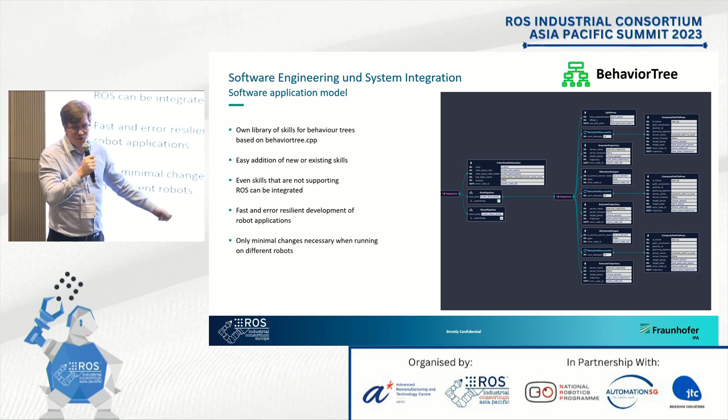Otherwise, we've also now integrated this with GitLab here. So in the end, the whole flow you can control from the cloud. And in the end... where's the play button? Somewhere's the play button, Ansible deploy.

You can then basically deploy it to your robot controller, and you're ready to go. So that's basically all built on open source software. I know there's a couple of different companies doing similar things, but we're trying to do it open source as much as possible. So you'll find the behavior tree CPP online. There's also our code that is called a ROS model, which you'll find on GitHub. The deployment is not yet released.

Okay, now we get to the next part. Here is basically a bit of the test fields that we use for developing this technology. The first one we finished in 2022, with basically 3 robots. You can see that down here below, with me running in the picture.

In the end, that was one of the first test lines we had to use that system and model everything. At that point, we weren't yet using behavior tree CPP, but had an implementation in ladder on the PLC. That was not the best idea.

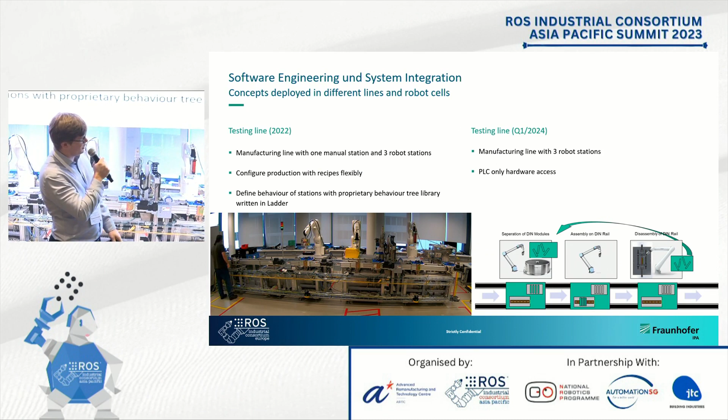That's what we hopefully will have done in Q1 2024. That's mainly a hardware availability issue. So there we're going to build a similar line, but with a different process than we have here. We're going to focus on DIN rail assembly because that uses a bit of force-controlled assembly.

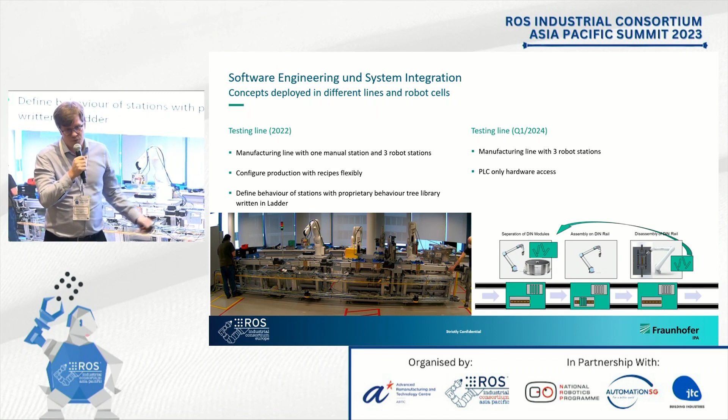There we're basically going to have the whole behavior specification done in behavior tree CPP based on ROS, and PLCs will only be used as easy hardware access anymore. So the whole control flow will be in ROS in that case.

Okay, now I talked a lot about our system integration tools, and I also wanted to go into what we do in terms of creating environments for testing ROS. One of the big issues right now if you want to build a ROS application is that you need to know what hardware you can actually use. We've seen a lot of talks today about having great software we can use, but in the end in robotics, software is just one part.

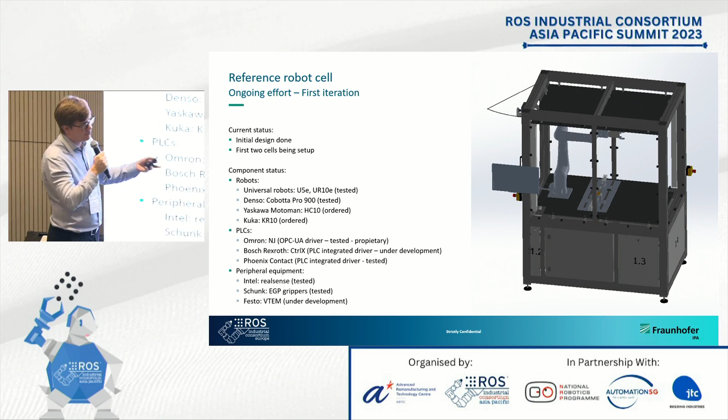One step we want to do here is create some kind of reference cell where we have a couple of components that are well tested, well in use, so people have the ability to relatively easily test their new solutions, their new software on a system. So the first step is designing a robot cell that is relatively cheap, but still industry ready.

So our current status is that you can see here on the right the first cell design. That is done, and we've ordered 2 of those, and they have arrived now, so we're currently in the process of setting up. We are now trying to get a couple of ROS2 robots together that we've actually tested and can say they really work, and figure out how to set up the drivers and so on.

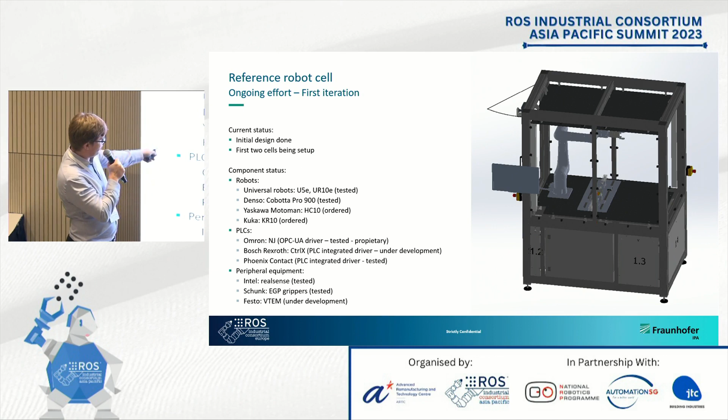So that is basically the list, and we've seen that before - we're focusing on these 3 PLC types, and a couple of different peripheral equipment in the first stage. So that's work ongoing here.

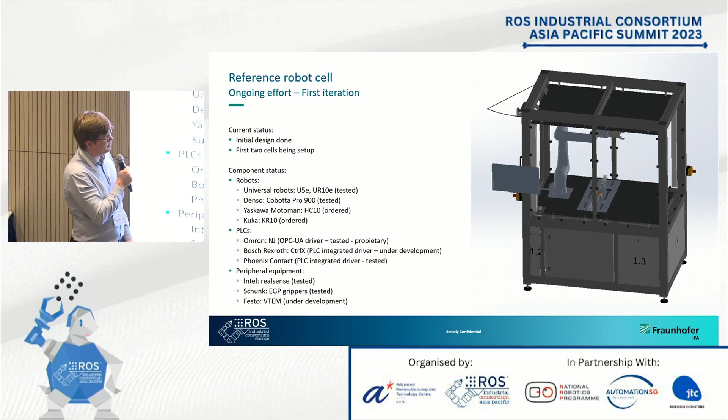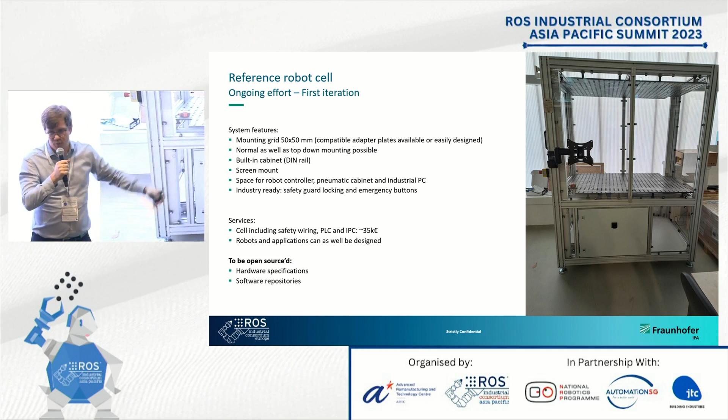So we're trying as well to standardize a bit the hardware interface to make this more modular. There we're using, let's say, the German engineering capabilities - you can see this 50 by 50 table. That's basically a pretty common thing used in welding for positioning the pieces you want to weld.

But what we've noticed is that this is really something you can also use in cells you want to reuse for different purposes. It's very accurate positioning and very well fixed. We have basically 2 of these in the cell, one on top and one on bottom, so you can mount the robot as a top mount there.

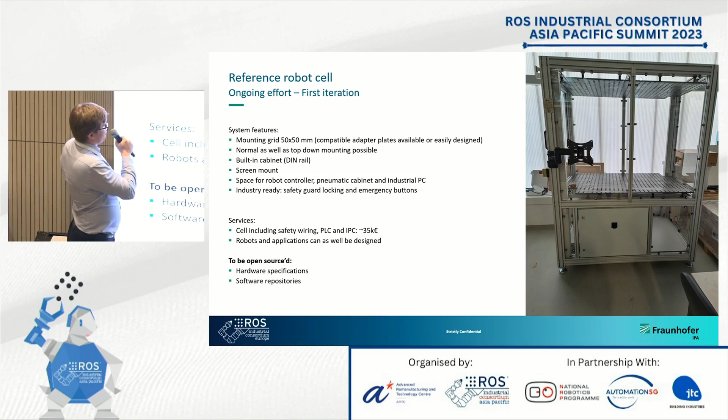A couple of different features - you have DIN rail, cabinet, and space for all kinds of things. So if you want to build such a cell or a robot cell that supports ROS2, we have now a couple of experiences with building such a thing. If you're interested, just ask us. We can provide you plans and hints on what can be done and what not.

As I said, we're also going to open source parts of this. On the one side, we are going to open source the specification of the robot cell. And we're also planning on open sourcing at least a couple of software repositories for different kinds of combinations of components that you can have in that cell.

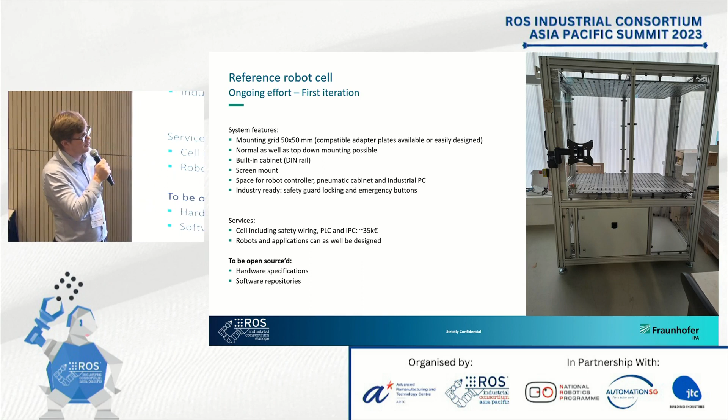Why are we doing that? It's not just for the good of everything. On the other side, we actually have a bigger project around that - this AI Matters project. In the end, this is part of the AI Matters project where we try to create testing environments, and this is basically the setup that we're currently planning for that.

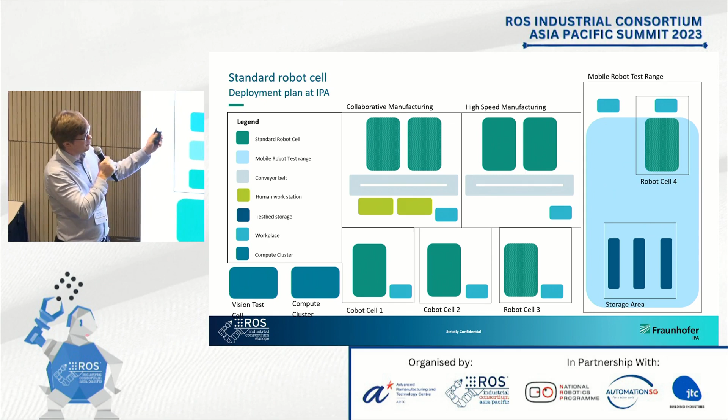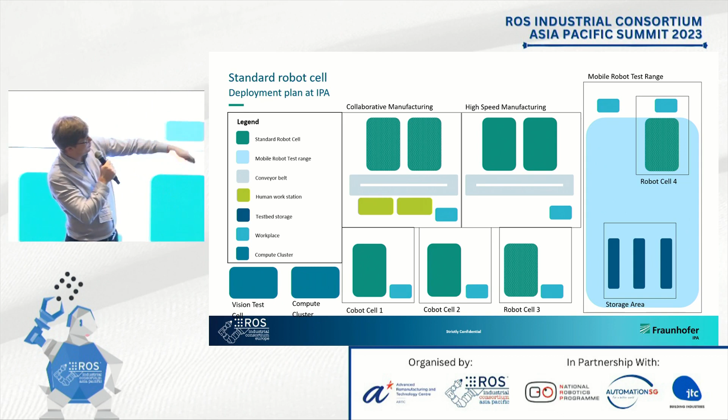On the one side, we're going to set up a couple of manufacturing lines - one collaborative, one high speed with different kinds of robot cells. We're going to have a couple of just robot cells for companies to run tests at Fraunhofer IPA, and then we'll also get this mobile robot test range to stage logistics and warehouse environments.

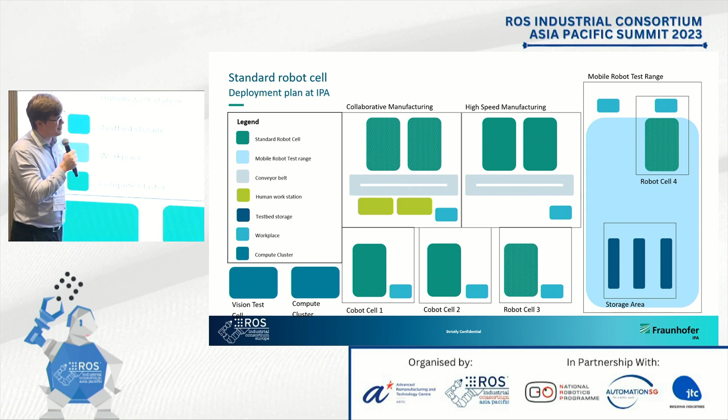Plus, that will be great for the NVIDIA guy to know - we're going to buy a couple of compute clusters as well for that, and we're going to have the vision test cell. So if you're interested in having some of the newest hardware for these kinds of tests, we're going to get that, and it's going to be ready hopefully in June next year.

So that's a couple of the projects that we're running. There are more, so if there are any questions, just come to me and ask me. And that's already everything that I had for today. Thank you very much for your patience, and I'm open to your questions.